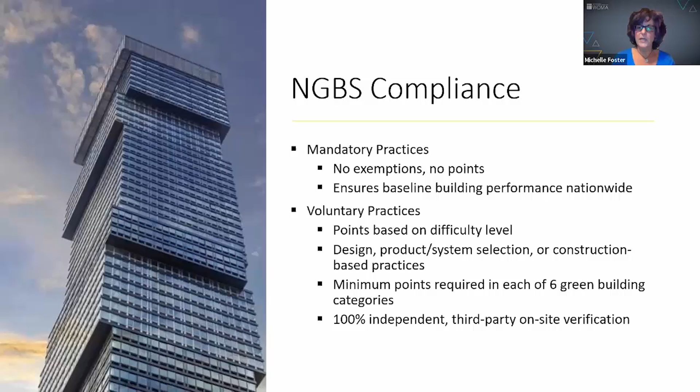The other thing that sets the standard apart is that there are minimum points required in each of the 6 green building categories. I'm going to talk about that in a little bit of depth because that makes the NGBS very comprehensive, and it also makes it probably the most rigorous green building rating system being used today in the United States. And then, as I mentioned, we have that 100% third-party on-site verification. So this chart really is key in understanding the National Green Building Standard and how it works and how it sets itself apart from the other rating systems.

So if you can look across the top row, you'll see the 4 different certification levels that are possible: bronze, silver, gold, or emerald. And then if you look down in that middle fat column, those are the 6 categories of green building practices. And now there's nothing unusual here: energy efficiency, water efficiency. If you were to look at any of the other green building programs, you're going to see the same categories. But what really sets the NGBS apart is that there are minimum point requirements for each of these 6 categories, and the building is going to be judged by the lowest score.

So for example, you must hit, if you're going for silver, 64 points in lot design, 39 points in water efficiency. Let's say your building can hit the 334 points for silver, can hit all the point thresholds for everything, but maybe for water efficiency you're at 35 points. The entire building would be certified at bronze. So you're going to be judged by your lowest score. This really makes the NGBS very comprehensive. An architect or a developer can't just get all of their points in one specific category of practice.

Having said that, lots of rigor, lots of flexibility. And I know that sounds like a contradiction, but let me explain why. So if you were to look down at the bottom, for example, the total points required for certification, 231 for bronze, 334 for silver, that is out of over 1,100 points to choose from. So while it's very rigorous for figuring out how a building is compliant and having to meet these minimum requirements, there are lots of practices and points available for a building to get certified.

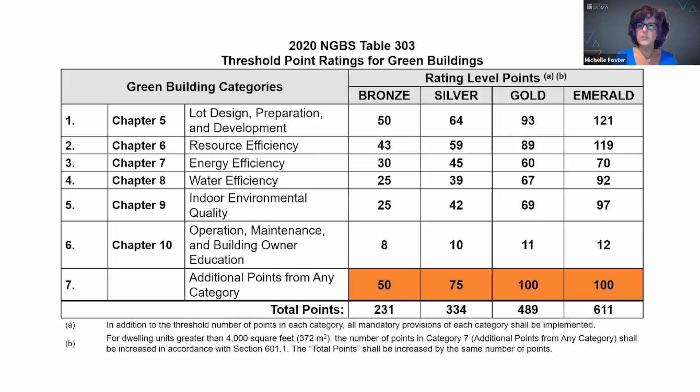So as I mentioned, the 2020 National Green Building Standard was in development for the last 3 years, recently approved by ANSI just this past January, and then became available for certification in April. And a number of really big changes that we're going to talk about today.

First and foremost, the scope was expanded to really include a wider variety of residential uses. The Consensus Committee really wanted to make sure that any buildings that we were living in and had sleeping accommodations, such as assisted living, extended stay hotels, could be included in the scope. There was a new water efficiency performance path added. I'm not going to talk much about that today, but that was a new way to be compliant with water efficiency. And then an entirely new certification level for single-family homes, townhouses, and duplexes.

One of the other big changes was that previously the NGBS could only be used for multifamily buildings or the residential portion of mixed-use buildings, and the 2020 NGBS now expands that to allow mixed-use buildings, so long as the commercial area is not more than 49% of the whole building, to be certified in its entirety. And that was really a reflection of the fact that many of the buildings that we are building today are mixed use. There's often 1 or 2 floors of retail and commercial on the bottom of a multifamily building, and we want to be able to certify those buildings.

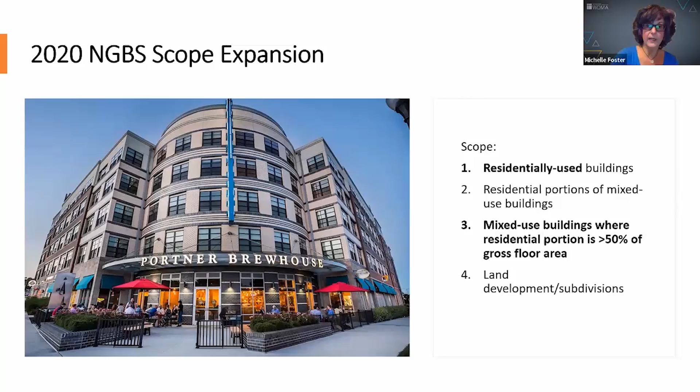When I talk about the definition being changed for residential, what I mean is that it was made to be more expansive, recognizing that there are certain buildings that really have residential-like uses that previously could not meet the definition in the NGBS. And so in particular, we had lots of requests from assisted living, some dormitories, extended stay hotels. These are buildings where people are really doing the things that you would do in a multifamily building or in a single family home. And so now those buildings are allowed to be certified under the NGBS.

So we are able to certify any buildings within the IRC scope, Group R occupancies in the IBC, and then very specifically assisted living facilities, residential board and care facilities. Group I-1 occupancies as defined in the IBC are all considered residential, specifically just for the NGBS and the certification program. So these allow us to do things, as I mentioned, like hotels and motels, whether they're extended stay or not, dorms, fraternities, even assisted living facilities.

Assisted living facilities in particular have been an area of great growth. We've had lots of requests to have those facilities earn a green certification, but oftentimes if they had, for example, 10 memory care units where those residents did not have the facilities for cooking, they previously could not use the NGBS. So we're really excited about the ability to do more of these types of buildings.

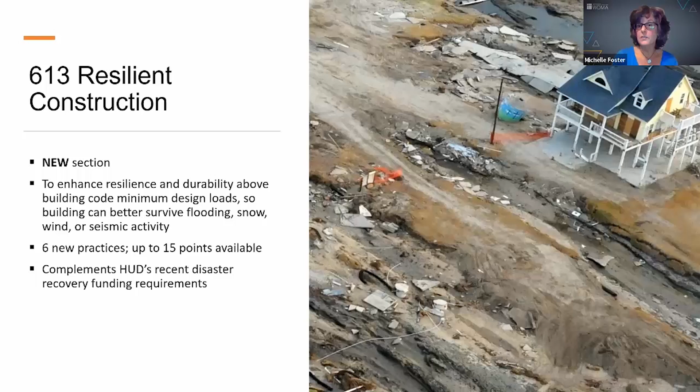So we have started to do quite a bit of work in the Houston area and Puerto Rico, and I think this practice going forward will be a really nice complement to that federal funding and that desirability to sort of look how we can make buildings that we're building now more resilient in the future for threats that are coming up. So you can see there's a choice, and the points are based on how much you're doing for the design to make the building more resilient, ranging from 10% above the base design to 50% above the base design, which would earn you the maximum of 15 additional.

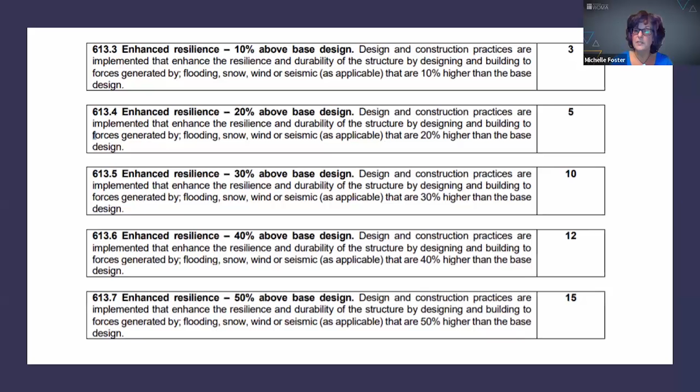In the National Green Building Standard, Chapter 7 has to do with energy efficiency. Again, as a reminder, the baseline performance is going to be the 2018 IECC, but what the Consensus Committee really wanted to do here is provide a little more flexibility for compliance. So they have added a new alternative gold compliance path I'll talk about briefly. They added a new ERI target compliance path and 6 new innovative practices going forward.

As a little bit of a review, there are a number of different compliance options that architects and builders and developers have with regard to energy efficiency. They can choose to do the performance path, which is the path that one would use if they're going to be doing modeling to show that the building meets that minimum threshold above the 2018 IECC for bronze and higher levels than that. But there is also the prescriptive path approach, and this is more of a checklist so that as long as that particular building can earn sufficient points by incorporating the practices that are in Chapter 7, they can get certified that way.

One of the things, again, that I really like about the NGBS that I think was really just smart on behalf of the Consensus Committee is that using the prescriptive path, a building can earn bronze, silver, or gold, but not emerald. The Consensus Committee really wanted those buildings attaining that highest level, that emerald certification, to go through that performance path to use that modeling approach. And so there's a really nice transition path for newer builders coming into the program. Maybe they've not used this green certification program before, to start with the prescriptive path, get used to the program using that checklist approach, and then move to the performance path when they're doing more modeling.

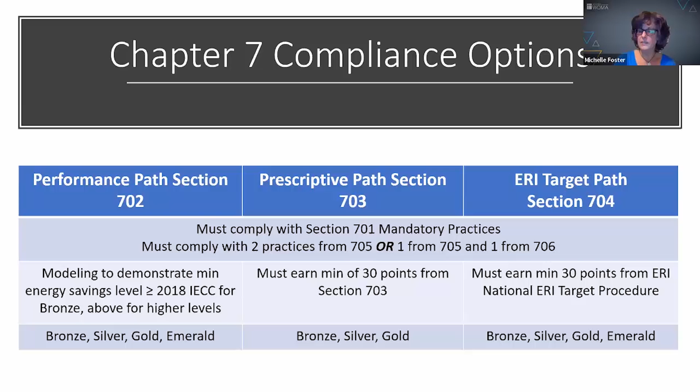In any case, regardless of which path you're using, you're going to have to comply with all the mandatory practices that are in Section 701 of Chapter 7, and then get some additional practices. And again, that really gives us this nice baseline across the country, regardless of where you are and your state and what that requires. And then, as I mentioned, new to the 2020 was the ERI target path. This is available to all levels, bronze, silver, gold, and emerald, and it gives a little more flexibility for builders and developers coming in how to be compliant with Chapter 7.

So the performance path, the other thing I think is important to mention is that one of the slight changes that the performance path made in the 2020 NGBS as compared to the 2018 code was that they were very specific to include on-site renewable energy generation, unlike the code. So that can be included in the baseline calculation of whether or not the building is compliant with the minimum performance levels. So there's a lot that you can do, not only just the minimum requirements for improvements to envelope, air infiltration, heating, cooling system like the code would require. And we're seeing builders come in and really use that flexibility to be able to get certified.

The other thing that was an important add, as I mentioned earlier in my reference to Puerto Rico, was referencing the tropic climate zone that is in the IECC R401.2 and allowing a compliance path there. In many buildings in Puerto Rico or in the Caribbean, it's very common for them to not have any air conditioning at all, or to maybe only air condition parts of the building. And so this is sort of recognition that those buildings are very low energy and should still be able to achieve certification. There were also very specific window recognition requirements for the tropical zone. Again, understanding that those buildings often don't have HVAC, or they're not conditioned spaces, and they have different window types they're using.

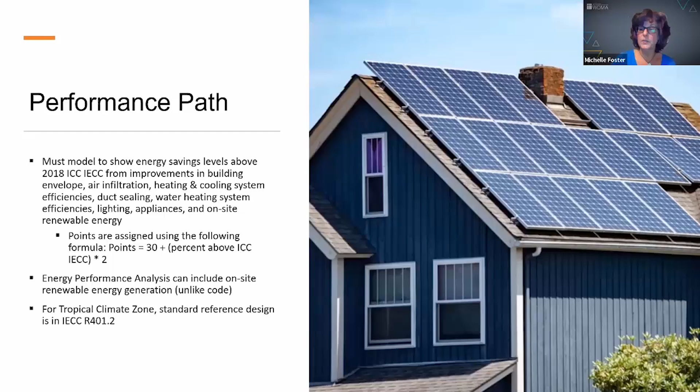As I mentioned, there's the prescriptive path, which is more of a checklist approach for compliance. There are a number of new things that were added to this. ELR was added as an alternative to ACH to calculate the building envelope leakage. In particular, ACH can be less favorable to smaller houses or smaller units. So this was a recognition that apartments, multifamily buildings, and smaller houses can be more sustainable because they are smaller. There's also a clarification with regard to the UA and SHGC requirements that has to be met when doing the UA analysis, and they updated those fenestration requirements to the 2018 IECC requirements as consistent with the other updates from the 2015 NGBS. And again, added some clarifying language in a tropical exemption for the UA improvement.

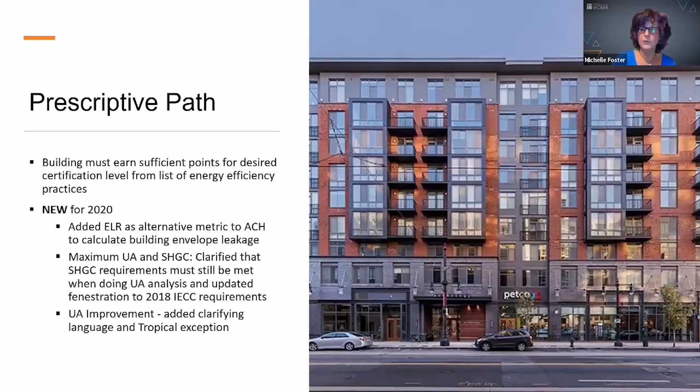We were really excited in particular to also see third-party utility benchmarking added. Many of you may know that HUD has a very significant mortgage insurance premium reduction for buildings that earn a green certification, including NGBS Green. One of the requirements they have, in addition to getting the green certification to be eligible for that MIP reduction, is that you do have to use Portfolio Manager to benchmark your building's energy usage. And so again, nice synergy here with this practice, so that when a building owner commits to doing that, they would also get points towards certification for their NGBS Green certification.

Chapter 8 is water efficiency. A number of new practices here. I mentioned there's a new water performance path. I'm not going to talk about that today. We do have lots of information if you are interested in that on our website. There were no threshold point changes, but as you would expect, there were a lot of changes to either the points available for a particular practice or the flow rate for the fixture that would be eligible to earn those green points.

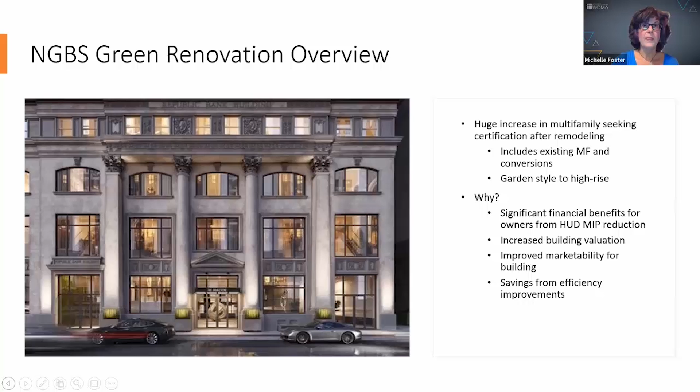Chapter 11 works a little bit different than the rest of the NGBS, just to review with everybody. Unlike new construction, which uses chapters 5 through 10, all of the remodeling requirements are embodied within Chapter 11 itself. For the most part, the Chapter 11 practice numbers will parallel those for new construction. So for example, if 505 is stormwater management in Chapter 5, that same practice would be brought over to Chapter 11 as 11.505.

There is a requirement for existing buildings to comply with all the mandatory practices in Chapter 11. However, there is an exemption that they're only required to be complied with if it is relevant. So the example that I always use is if you are doing a moderate rehab of a building, one of the practices that's mandatory in the NGBS is that you have to ensure the appropriate tile backer material in a bathroom or any wet area.

If the developer or the owner is not renovating or rehabbing the bathroom area, they do not have to go back and rip that up and change it just to be compliant. The verifier will have to come in and inspect that property and make sure there are no safety or moisture issues. They would have to do it if there's any moisture issues present. But as long as it's otherwise fine, we don't want them to rip out things that don't need to be ripped out. So the mandatory practices are only required if they're relevant.

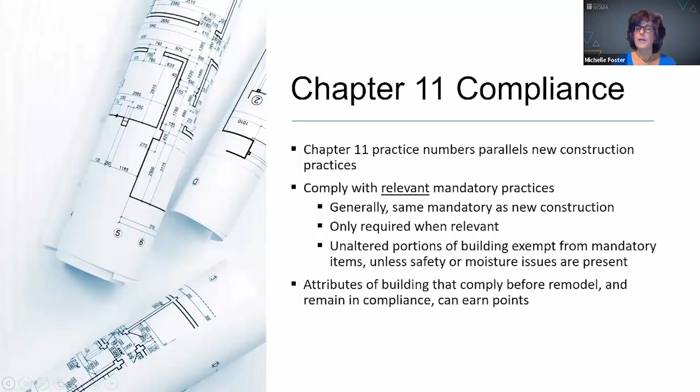Chapter 11 of the NGBS really works well with renovation, and it really works well for historic buildings where there may be requirements that they can't change the facade or the windows of the building, but they need a path towards compliance or have some other restrictions, and it works really well with anything from moderate to gut rehabs.

So the point system is a little bit different as well, and I'll explain that in a minute. Until the 2020 NGBS, there was only a performance path for water and energy. One of the changes in the 2020 was that it adds for water and energy efficiency both a performance path and a prescriptive path. So that's some new flexibility.

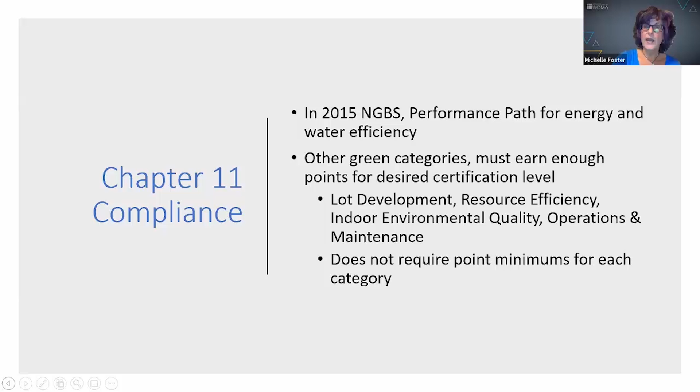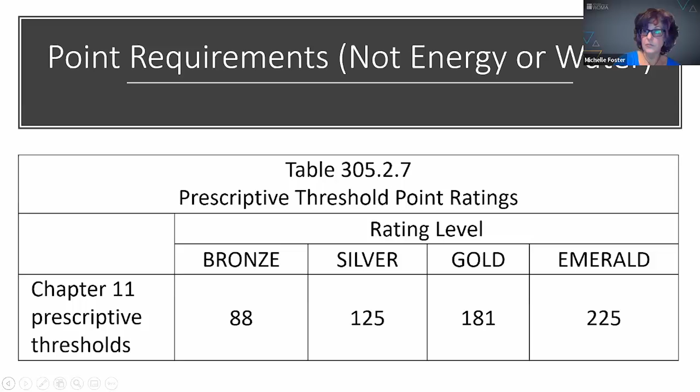But otherwise, for the other categories of practices, rather than point minimums in each chapter, there's just cumulative points. So for a building looking to earn just bronze, for the other chapters, not water and not energy efficiency, you would just have to get 88 points. You could get those points in any of the other green practice categories.

And then the choice you would have was, do you want to follow the performance path? If so, you would calculate the baseline energy and water use for the building as is. The verifier would work with the building owner to figure out how much energy and water that building is using today, and then plan to implement practices and improvements to get a reduction in energy and water use depending on the certification level they want. For bronze, they would need a 15% reduction in energy use and a 20% reduction in water use.

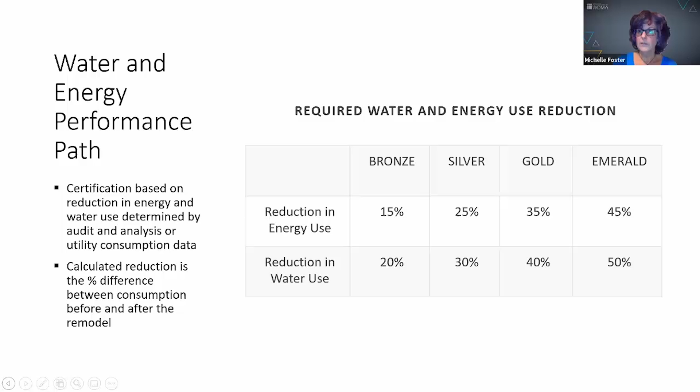One of the things I want to mention is we have quite a few older buildings coming in, and they can easily attain those higher levels of certification because they are so poorly performing. Changing out the major systems and attributes of the building and upgrading those to more state-of-the-art systems really can get those higher levels of savings.

But there's also the opportunity to use the prescriptive path now. This is particularly useful if the building is not as old, maybe built 10 years ago, and changing out the HVAC system may not make sense. In this case, you would use the prescriptive path where you just have to get sufficient points towards certification, and you can mix and match. You could do the performance path for energy and the prescriptive path for water, or vice versa, giving some flexibility.

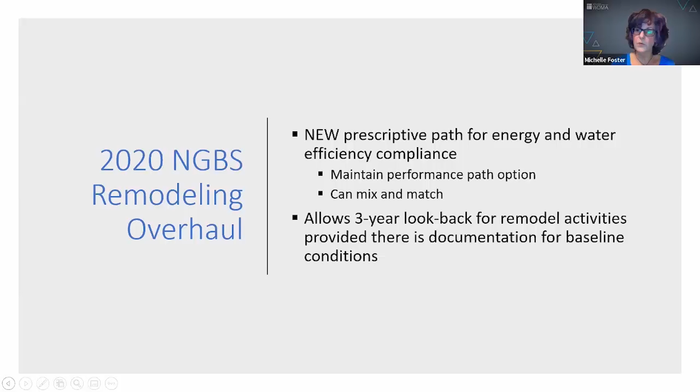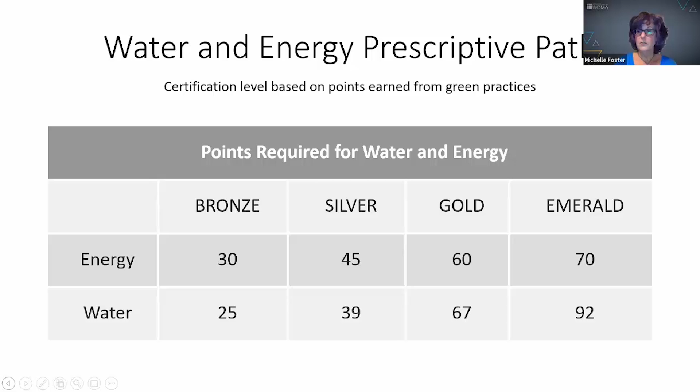In addition, the 2020 said if you owned a building and had been doing upgrades in the last 3 years, and you can document that, we can recognize that in the certification process. As long as there's sufficient documentation of the baseline conditions, those can be considered towards certification. And these would be the points for certification for the prescriptive path for water and energy. So again, you can use either the performance path or the prescriptive path, and these are the point requirements.

Chapter 12 is brand new to the 2020 NGBS. I'm really excited to see how this will be used. This is a new certification level, certified. So you would have bronze, silver, gold, emerald, and certified. This would only be available for single-family homes, townhomes and duplexes. The idea was the consensus committee really wanted to figure out how the NGBS could be more relevant to single-family home builders.

If you think back to those original numbers that I mentioned and how we lag a little bit in single-family compared to multifamily. So the idea here was to really figure out, particularly for volume builders, how to make the NGBS something that provides value and that they want to pursue. One of the challenges for higher volume single family builders, or even builders that are new to the program, is that the point system that we have, as I mentioned, 1,100 points, hundreds of practices, the minimum requirements in each chapter, can be really complex for bigger builders.

So the average national builder may have 40, 50 models, and then with all the change outs that we have, it would require the verifier to literally have hundreds and hundreds of scoring spreadsheets. So the certified path takes a different approach. It's more like Energy Star, if you're familiar with that. It's a binary approach. You're either compliant and certified or you're not. All the practices in this chapter are mandatory. So the homes must be compliant in order to earn certification.

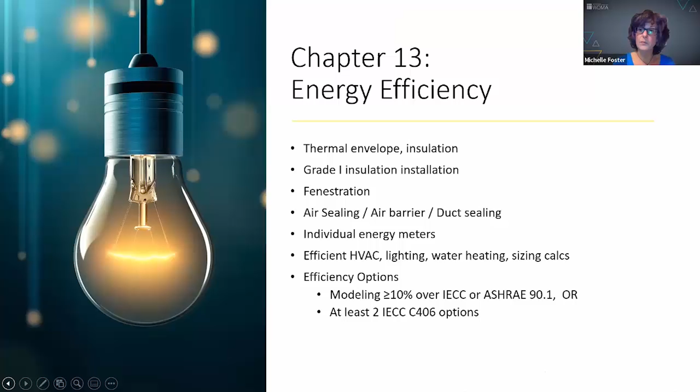For the full fitted out certification option, there are a whole host of practices in Chapter 13 that would have to be compliant with, and verification and certification can either occur at the same time as the residential portion or after. It depends on the leasing schedule. So oftentimes the developer or the builder will lease up that residential portion but not quite have tenants yet for their retail space. They could come back in later once they figure out who their tenant is and get that space certified. Lots of different requirements with regard to energy efficiency for Chapter 13. Here are just some of them. And again, all of the practices in Chapter 13 would be mandatory for that commercial space should they seek certification.

That's everything that I have today. I hope that this has been a useful introduction for the 2020 NGBS.